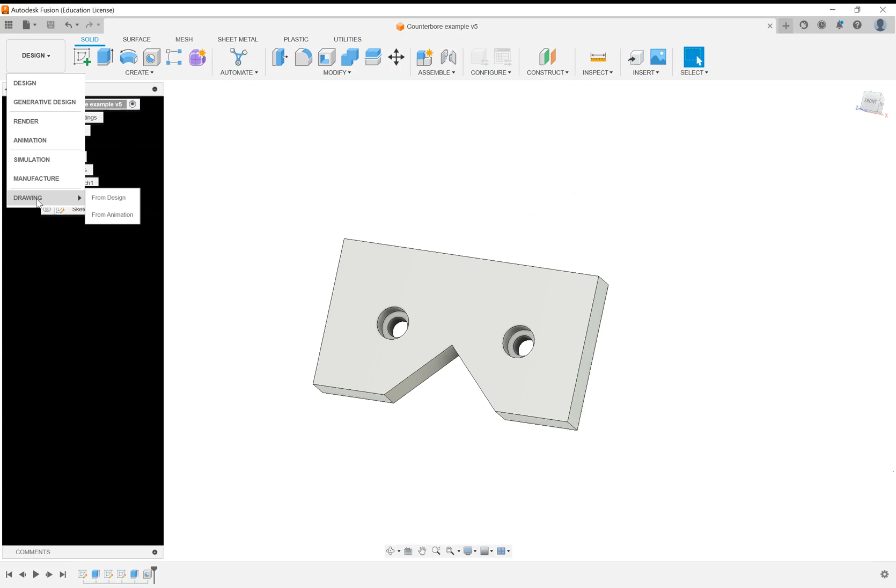Then we go up to this upper left where it says Design. We're going to click on that and it opens up a menu. I'm going to change that design workspace to Drawing, then go from Drawing over to Drawing from Design. I'm going to click on that, and then it's going to pop up a menu over here.

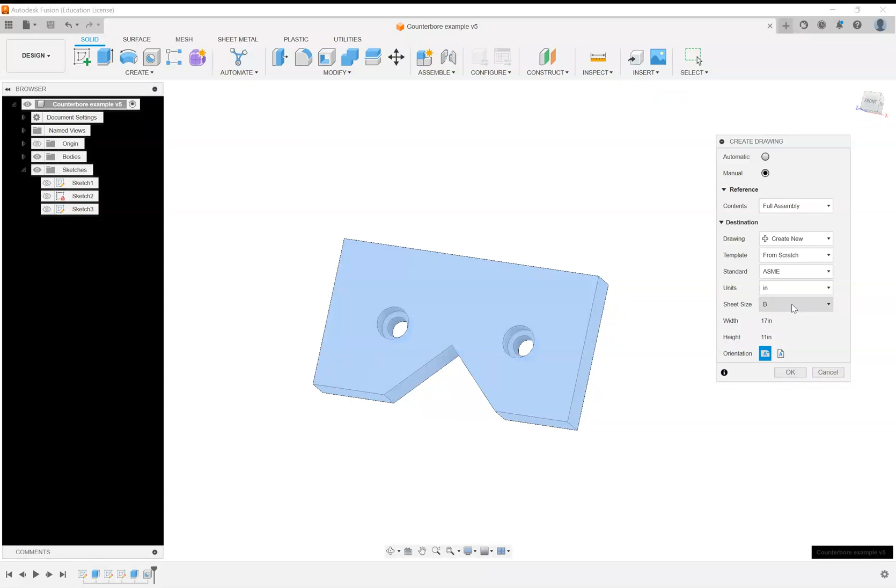So what we want to do is go past all this, and make sure that we're on From Scratch. Template from scratch. Standard ASME is good. ISO is metric, that's what we use in Europe, so we're going to leave it on ASME. Units should be in inches, and sheet size should be on B. That's just the size of the drawing and what it's going to look like.

Okay, and it's going to just jump to a new workspace and put in this drawing template. Now you notice it's bringing in the front view. That's one of the reasons why you want to draw on a specific plane, is you want the front view to be your first view that you place in here.

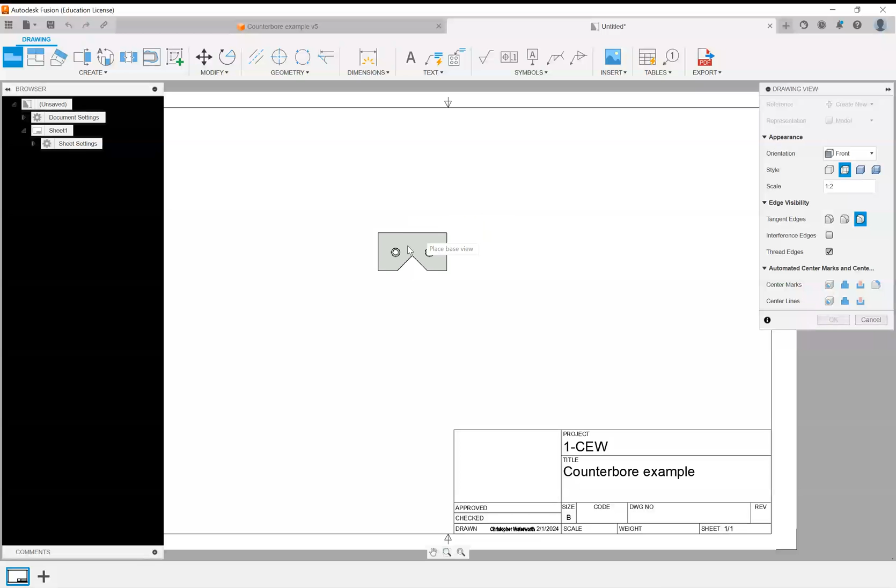If I go over here, this is very small, isn't it? It looks tiny. But if I go over here to this menu, the scale is set at 1 to 2. I can change that from 1 to 2 to 1 to 1. Now that means it's going to be size for size over here, much better.

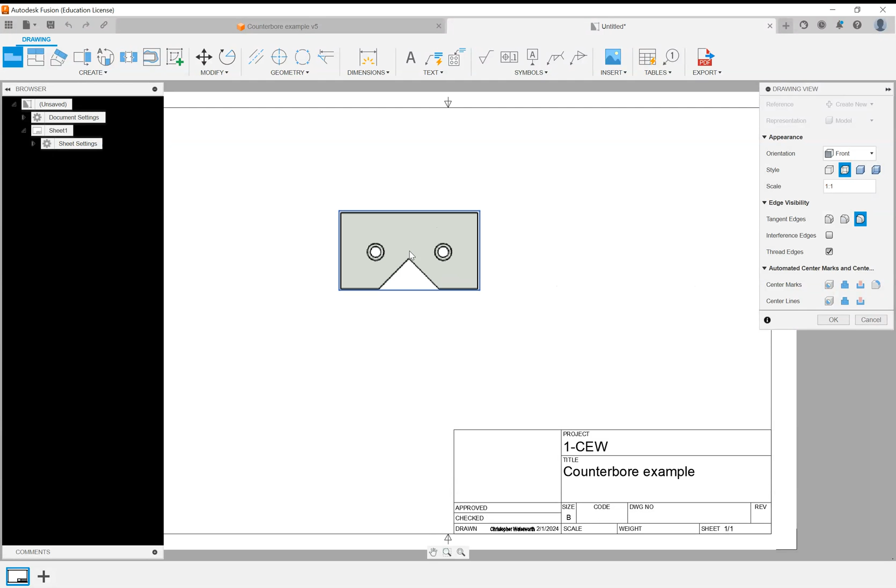So all I've got to do is find a place in the middle and place the base view, which is this, and click on my mouse, and it's going to place it there. Now hit OK.

So this is great. We've got one view. We can click, drag, and move it if we want to, but I'm going to keep this basically in the center for now.

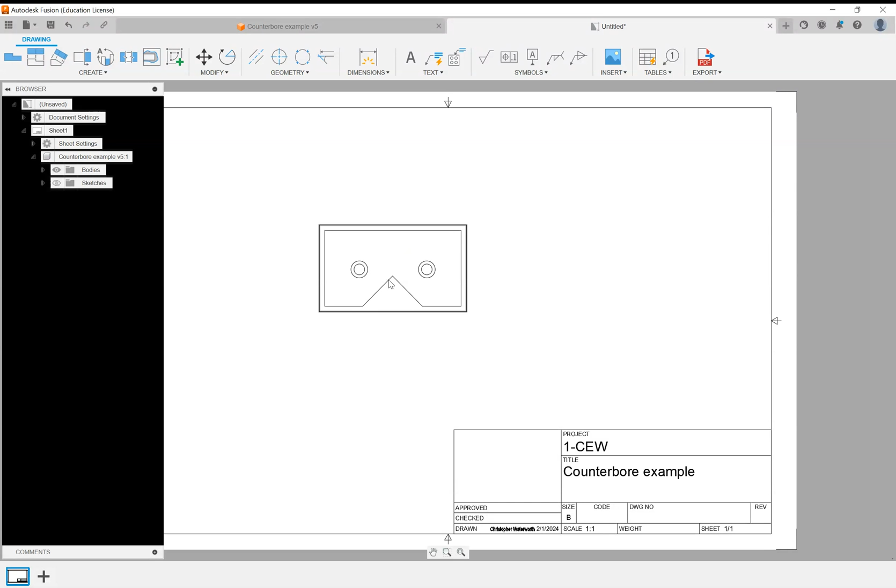What we need to do is some projected views from this view. I'm going to project to the right. We want to project to the bottom, because we want to be able to see this area here. We don't want that to be blind. So up in the top, near the left, second from the left on this drawing part of the menu, click on Projected View.

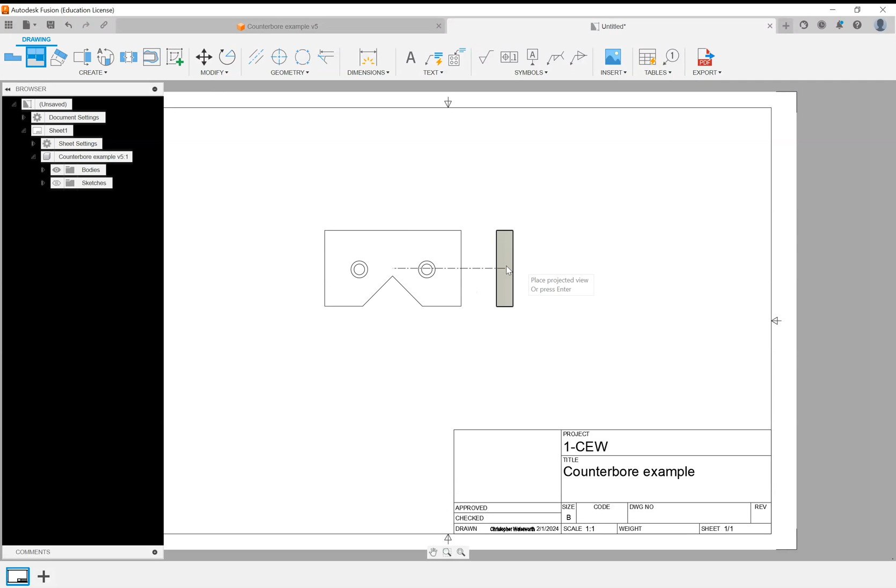Select the parent view, which is this original one. Click on that, and then without holding down your mouse, just move over to the side, click again, then move down beneath and click again. And then hit escape. Now that's it.

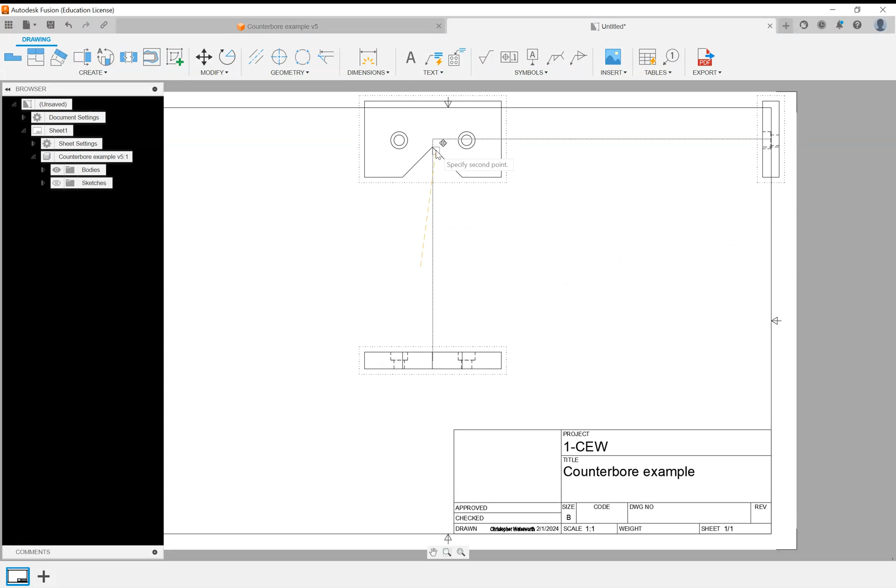You've got your drawing views. You can move them all around, but they do stay associated to each other. They're lined up nicely, and so we want this kind of pleasant to the eye, looking nice and balanced in here. You don't want something way over here and this up here, this kind of looks nasty, right? We want to do it so it looks good. And we have room all around to put our dimensions in later on, our notes and all those things.

One thing, mine's set up that it automatically comes with hidden views. If you don't have a hidden view, don't worry about it. All you've got to do is double click on a view, and you can change the appearance style right here. So there's from the parent view, so it takes it from here, or you can have visible edges only, which you don't see the hidden lines, something right here. This gives you both, so that's maybe what you want to pick if you don't have it on that.

All right, and once you've done with that, you just close out and you're done. Don't forget to click on save. Give it a new name. What it's going to do is take the name of the original file, so it's going to say Counterbore example drawing, but just accept that.

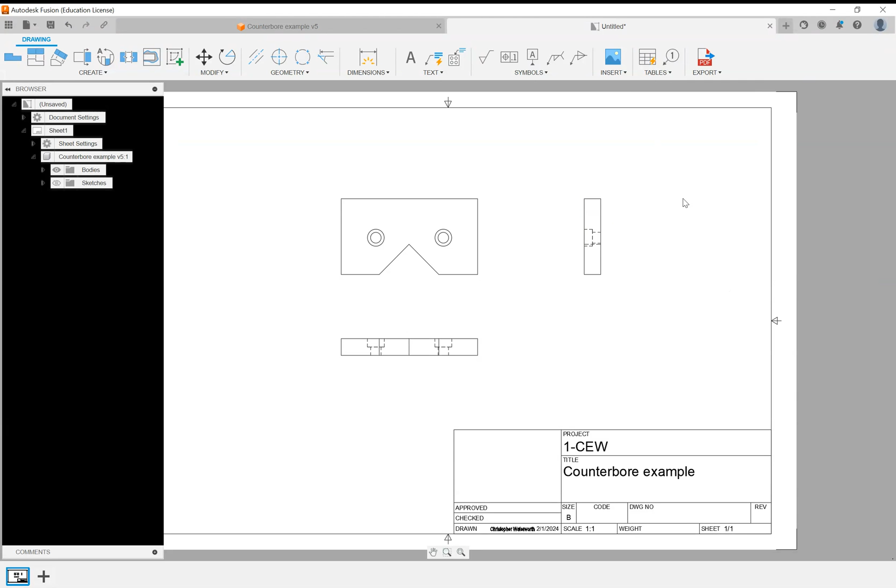I'll show you what it looks like. Save. Counterbore example drawing comes up automatically. Click on save and you're done.

And that's all there is to it for developing a drawing and putting just a few views in it. In other drawings, I'll show you how to do dimensions and notes, but that's all for now.